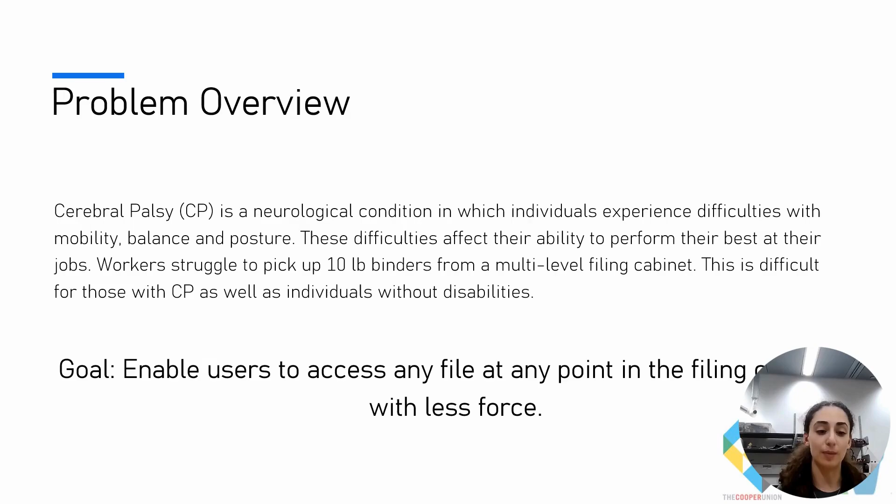In addition, the files have to be pulled out vertically in some drawers rather than horizontally, which puts a strain on the wrist and makes it difficult to access. So our goal is to enable users to access any file at any point in the filing cabinet with less force. Here you can see an image of the filing cabinet in the office.

You can see that it's very tall, very wide, and therefore the files are very dispersed, making them very difficult to access. So those in wheelchairs especially can't really access the files that are very high and very low. And also the drawers, specifically the ones at the bottom, require you to pick up the files vertically and then take them out, while the top one you can actually pull out horizontally.

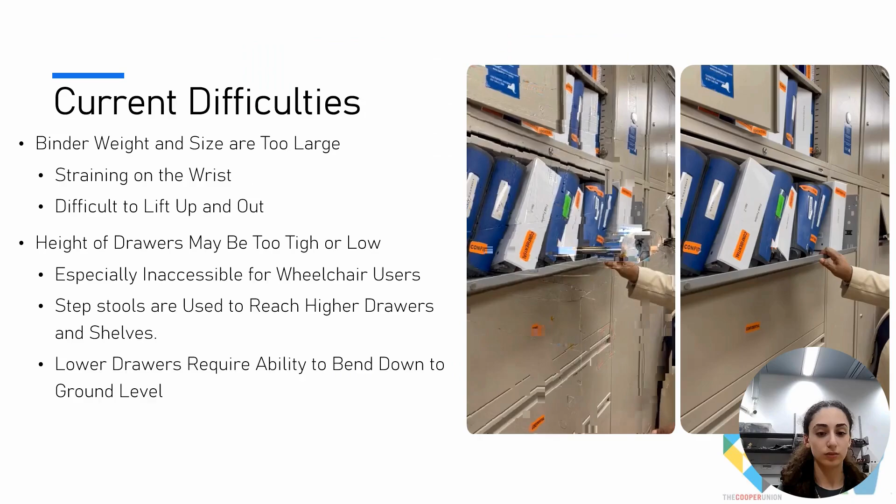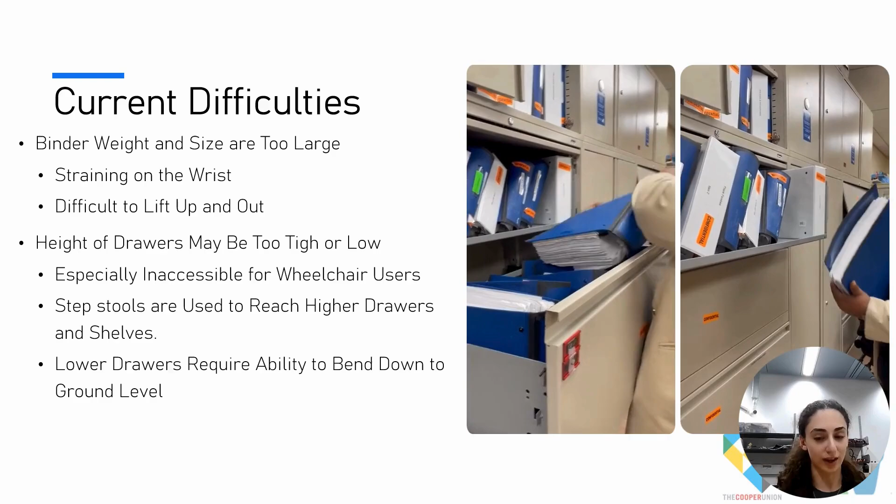Witnessing this in person, we saw and were told that it would be much easier for the files to be pulled out horizontally. So our task is to be able to make these files accessible in this specific way. However, another issue again is the height of the filing cabinet, and therefore the drawers vary in their height. So we want to be able to have these files held to a height that is accessible for everyone, and therefore they must be able to be lifted and lowered to any user.

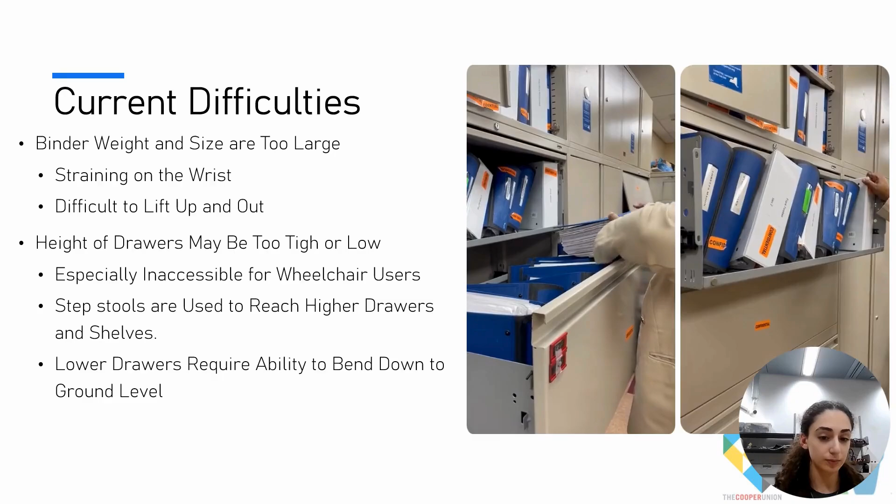This brings us to our requirements. We want this to be as safe as possible. So we want the speed at which the files are lowered and raised to be relatively slow, which is about 0.25 feet per second. We want them to be able to be accessed at any point, so the files and their drawers must be able to be lifted and lowered to any point within the filing cabinet.

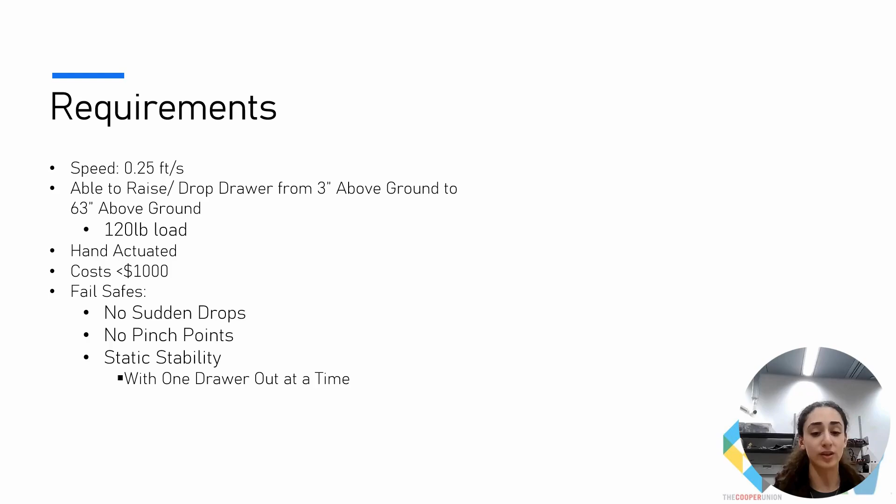We do have a design that is hand actuated as well, and within a budget of $1,000. We want it, again, to be as safe as possible. So we want no sudden drops, no pinch points, and we want it to be stable so that only one drawer can pull out of the filing cabinet at a time.

To solve the problems previously discussed in this presentation, our team has developed a new filing cabinet system. This system involves adding doors, one on each side of the filing cabinet, and within each door there are track extenders that can freely move up and down with a hand crank, which will be explained later.

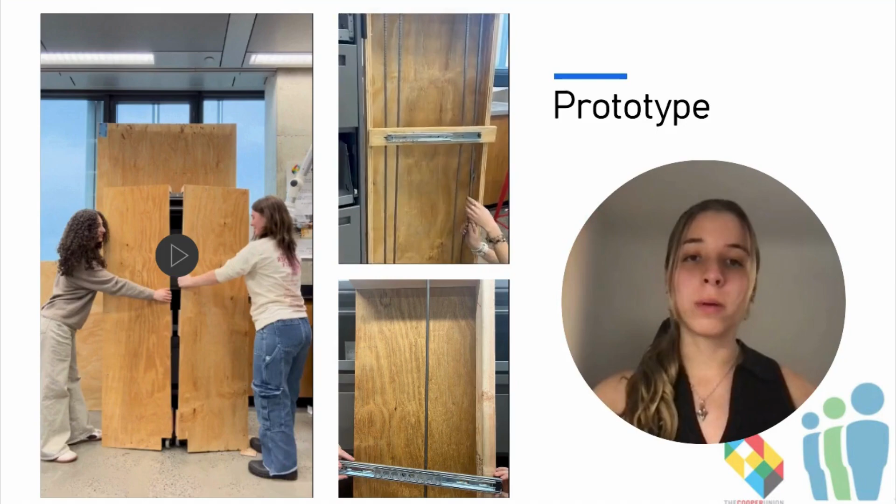So you can see in these two videos, the track is connected to a chain that is embedded within the door, and when you pull one side or the other, which will happen through our hand crank, the tracks can freely lower and raise, and also there's a rod in the center to prevent tilting.

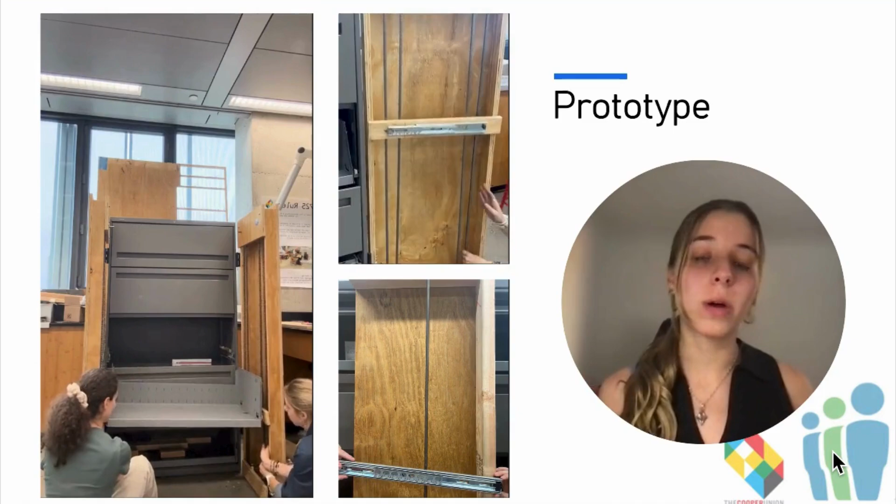So the entire process involves opening the doors, which is for safety purposes. This means that only one drawer can come out at a time. When the drawers are slid out, they will connect to our tracks in the doors, and then using a hand crank, the users can raise the entire drawer to a comfortable height to access any file they desire and want to work with. So here we have a general overview of our prototype.

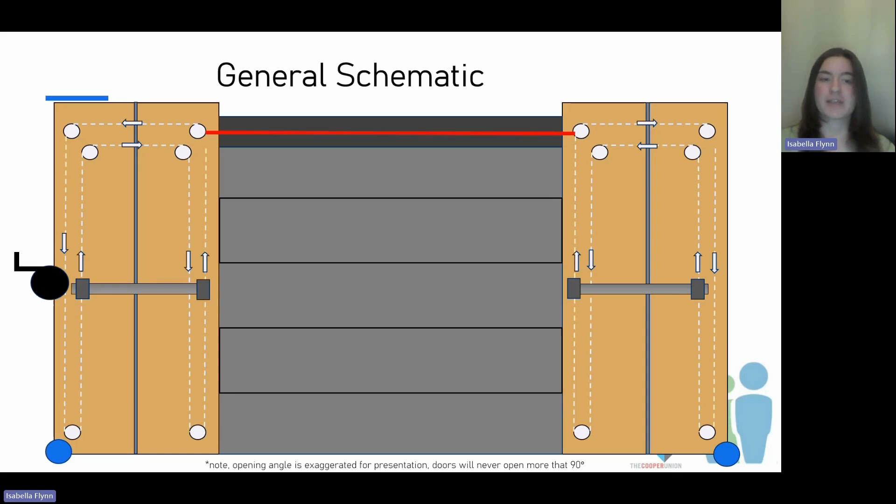We decided to add 2 doors to the existing cabinet. Within the cabinet, each of the drawers will have their faces removed to allow for easier ability to slide the drawer out onto our doors. The chain and sprocket system is actuated with a hand winch, which helps to significantly reduce the load of the drawers on this track extender. The 2 doors' motion is synchronized with the use of a flexible shaft, which, when the doors close, folds into the actual cabinet.

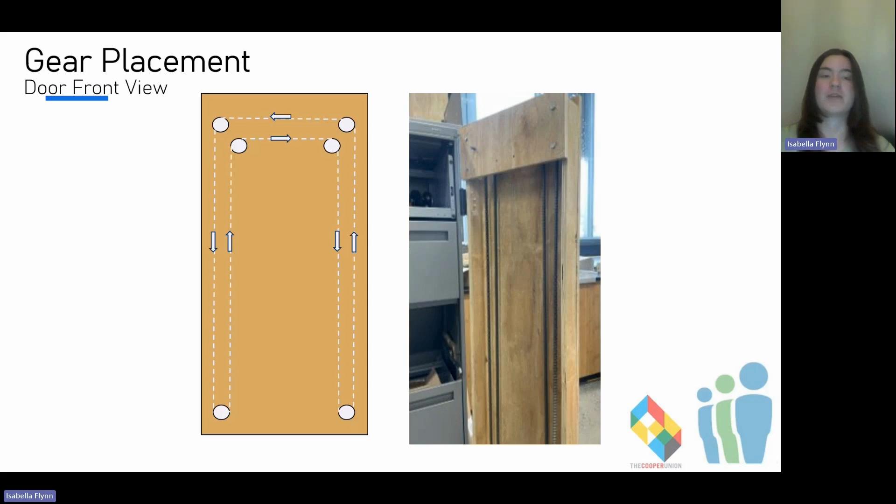Here is just the configuration of our gear placement. We decided to add an extra 2 gears at the upper edge because this is where we had more room, and because we needed to allow for a change in direction within the chains. Moreover, it's super important that our gears are coplanar to allow for the meshing of the gear to the chain to be smooth. So we decided to add PETG spacers to keep the gears coplanar.

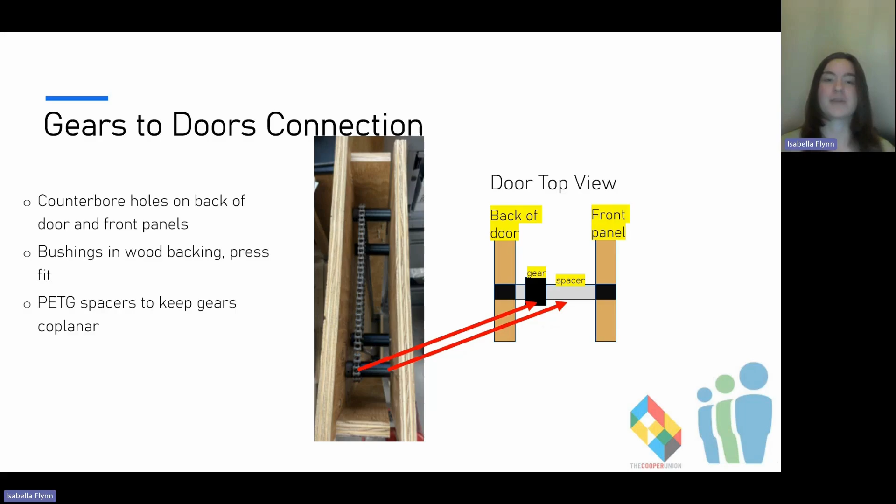Moreover, the gears are connected to the door through counterbore holes on the back of the door and the front panel. So they're sandwiched between 2 panels with counterbore holes.

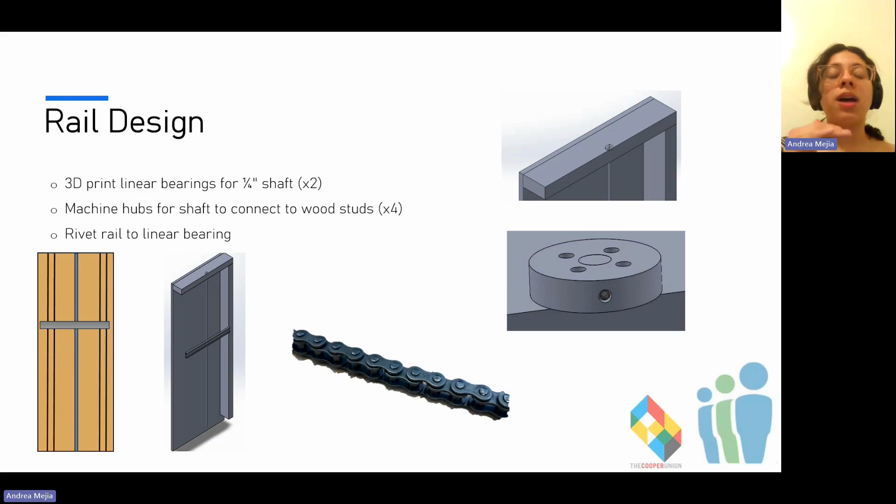I will be talking about the rail design. So as you saw in the videos, the rails are attached to the chains onto the pin in one of the parts of the chain, but also we decided to add a 1/4-inch shaft through the middle, which would attach to the rail through a linear bearing, and this would allow it to not rotate, because we were concerned that if we just used the chain, it would rotate. The shaft is also connected by hubs at the top and at the bottom of the door, which will prevent the shaft from moving.

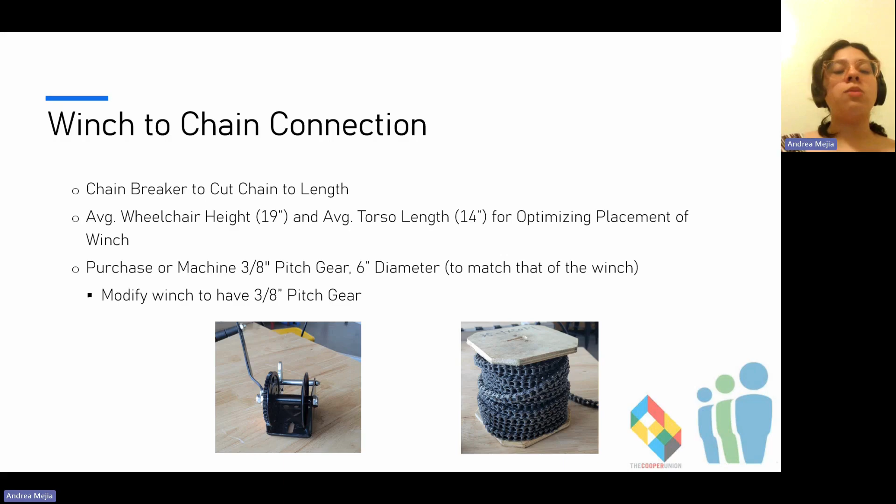Moving on to the winch and chain connection, we used a chain breaker to cut the chain to length to make sure it was tensioned and tight. We also found out that the average wheelchair height was 19 inches and the average torso length was 14 inches. So this allowed us to optimize where we were going to put the winch. And we also modified the winch a little so that it fit well with our chain.

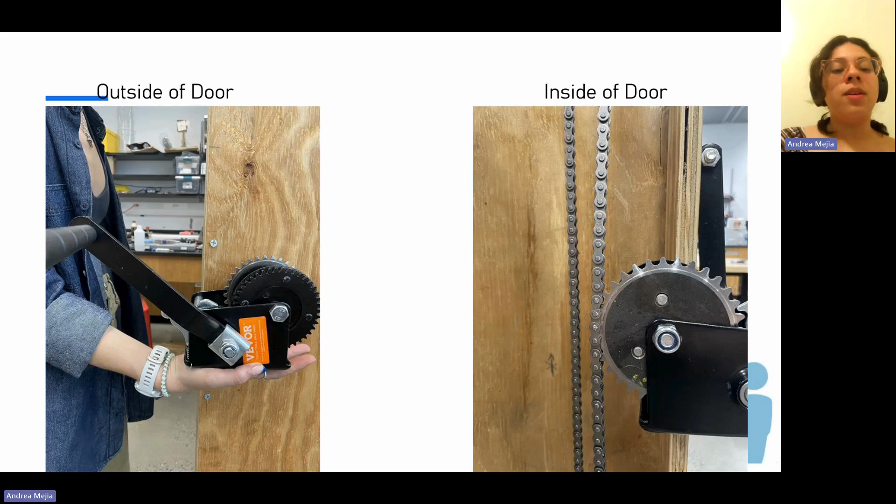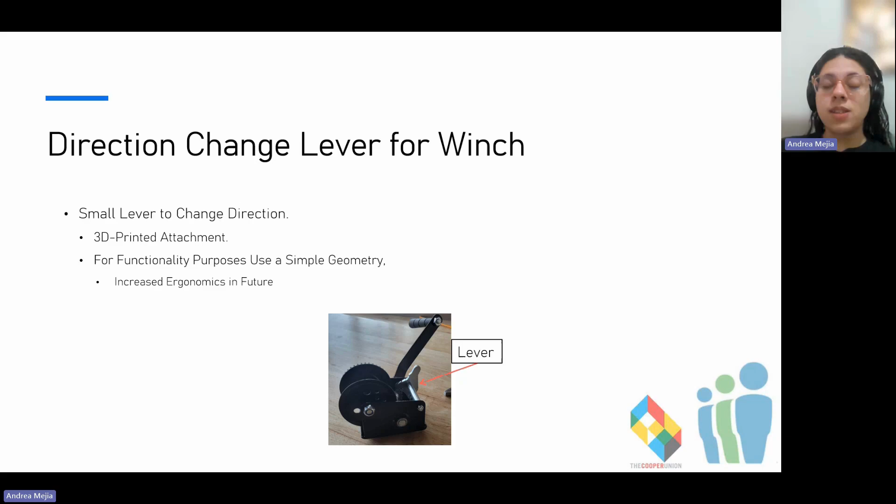And so here you can see a picture of what the winch will look like outside of the door and how the winch looks inside of the door, and that modification, how well it fits with our chain. For the direction change for the lever of the winch, we realized that it was too hard to move, so we are going to make an attachment so that there are no pinch points, but also so that it is easier to change directions from standing or if you were in a wheelchair.